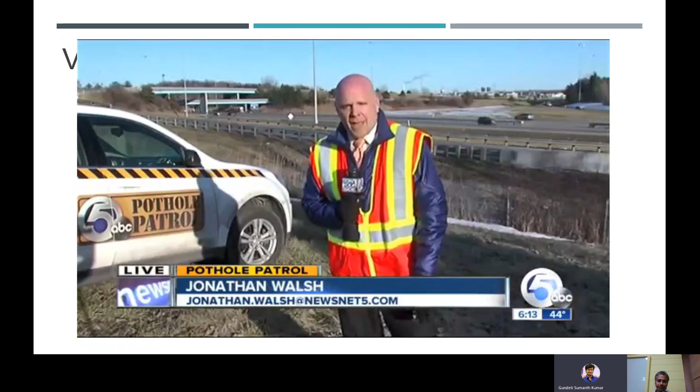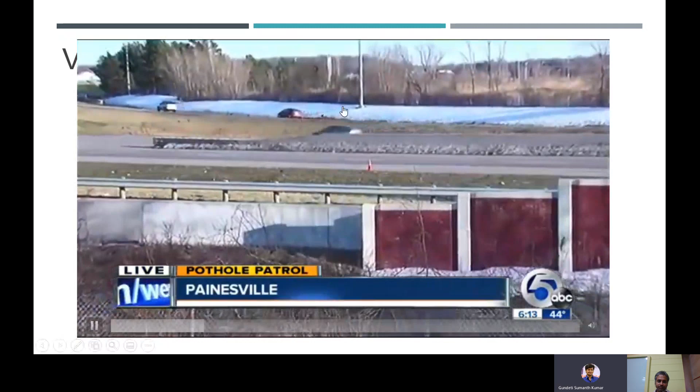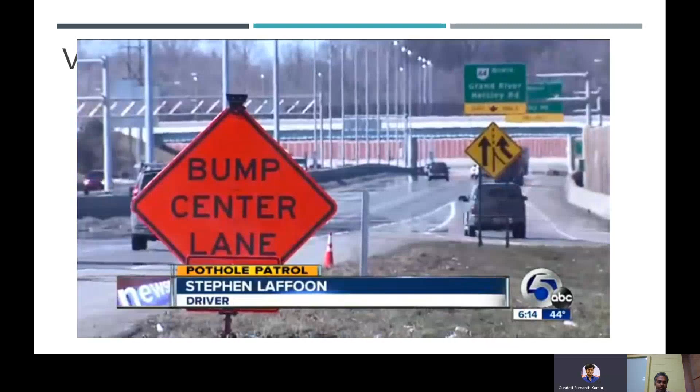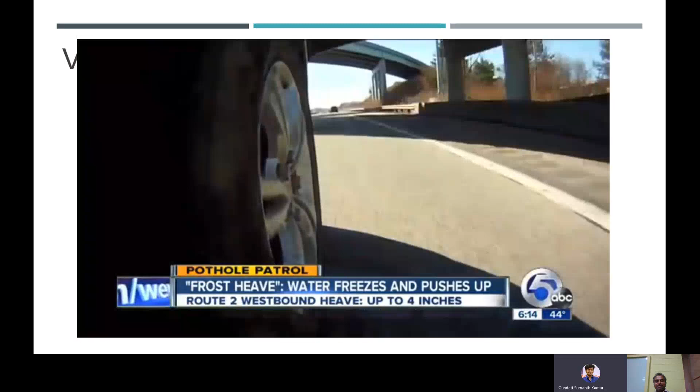These are the photos. These what is the problem? See, this happened because of the frost heave, and they already marked it. That on the road you can see the mark, the red color. They made a mark or symbol also in that on the road. See, this is what. Hmm.

Yeah, this was the pothole. These were the potholes created by the frost heave.

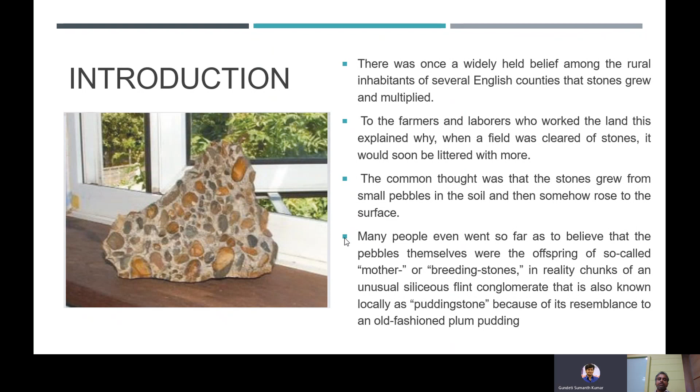There was once a widely held belief among the rural inhabitants of several English counties that stones grew and multiplied. To the farmers and laborers who worked the land, this explained why, when a field was cleared of stones, it would soon be littered again. Actually, what was the thought? The stones grew from small pebbles in the soil, then somehow rose to the surface. Many people even believed that these pebbles were the offspring of so-called mother or breeding stones, calling this phenomenon, or the stones derived from it, pudding stone.

In this video, let me explain what is frost heaving and how frost heaving affects foundations.

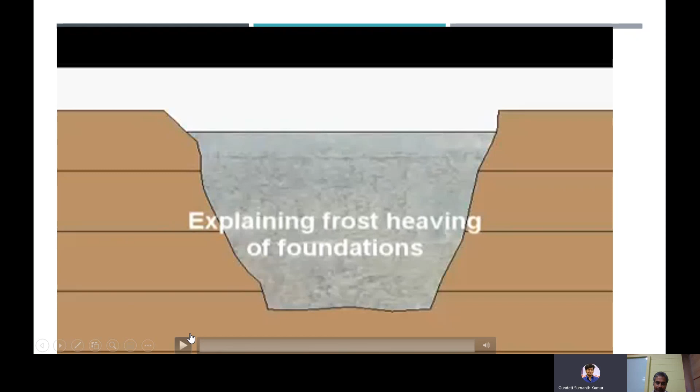This is the reason for those potholes and swelling of the soil.

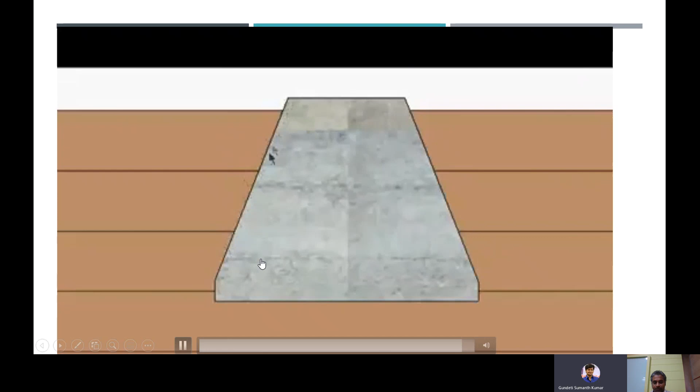So what is this frost heaving? Let us define this phenomenon. It's an upward swelling of soil. It happens whenever groundwater on freezing expands, and it generally occurs when the freezing temperature penetrates the soil and turns the existing moisture into ice, thereby generating an upward movement in the soil. This movement is called heaving, and the size of the ice mass increases because of the continuous supply of moisture.

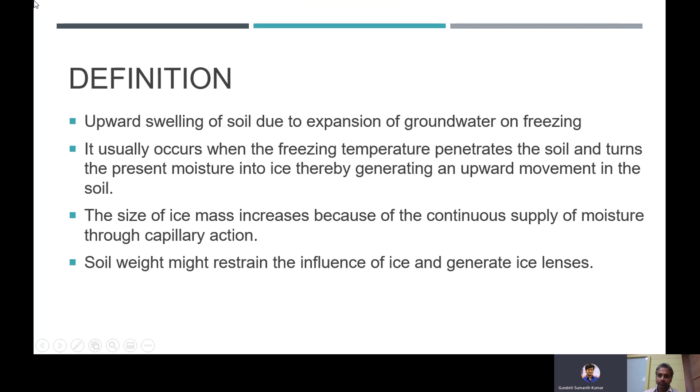Capillary action is a very common process in geotechnical engineering. The soil weight may restrain the influence of ice and generate ice lenses. So we can see a particular ground where this frost heave has already occurred, and the soil where it happens is called thawed soil, which is coalesced ice-rich soil. Ice grows toward the surface and upwards from the depth in the soil where freezing temperatures have penetrated. This leads to swelling of the soil.

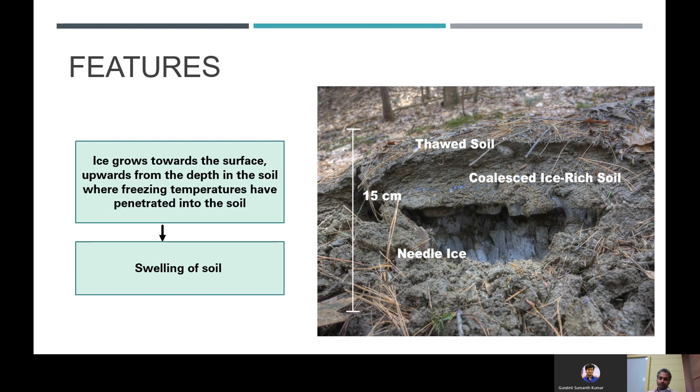Mechanism - let us go through the minute mechanism of this frost heaving. In order to grow this ice, in order to form ice lenses, what do you require? We require a water supply that delivers water to the freezing front. How can we achieve this? This is achieved by capillary action in certain soils.

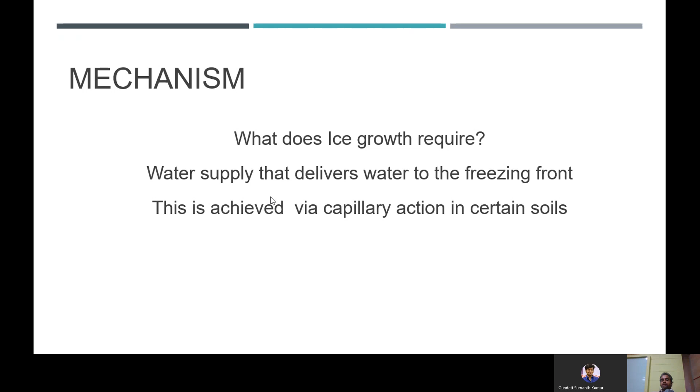We have to highlight two phrases: one is capillary action, the other is certain soils. Let us explain this mechanism further.

As freezing temperature penetrates into the soil, it converts the soil's moisture into ice. When moisture at the freezing area, as you can see in the figure, solidifies, water from other parts of the soil also moves forward to the freezing area. This happens due to capillary action. So what will happen? There will be an increase in the size of the ice mass. So soil weight and other objects above would restrain this ice growth, and consequently ice lenses are formed.

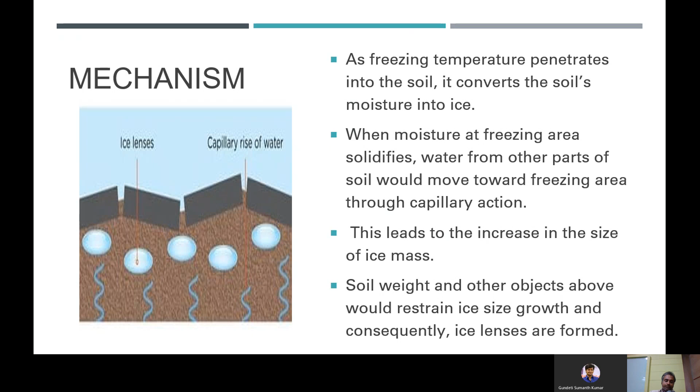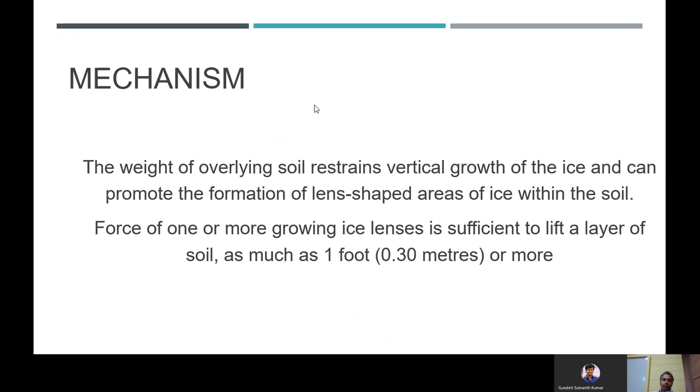The weight of the overlying soil restrains the vertical growth of the ice and can promote the formation of lens-shaped areas of ice within the soil. The force of one or more growing ice lenses is sufficient to lift a layer of soil by a foot or more.

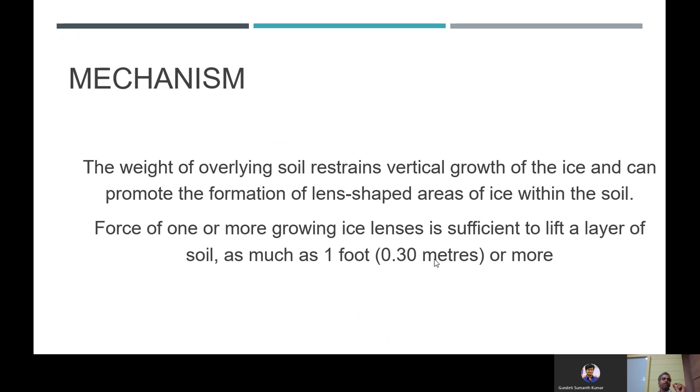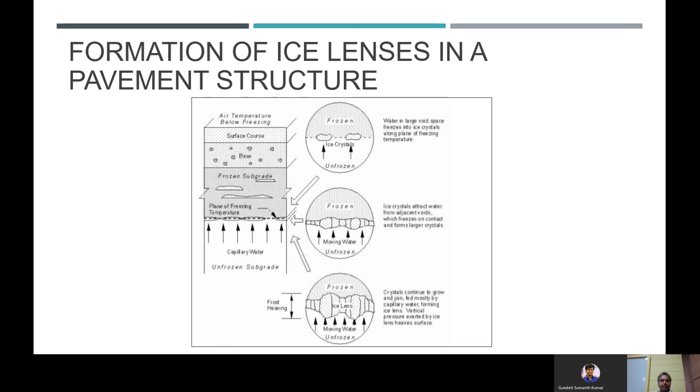Water moves upward due to capillary action into this layer, and ice crystals attract water from adjacent voids, which freezes on contact and forms larger crystals. Water moves from the unfrozen layer to the frozen portion, and the crystals continue to grow and join, fed mostly by capillary water, forming ice lenses. The vertical pressure exerted by these ice lenses causes the surface to heave, which is why it's called frost heave.

What are the problems when this happens? We have already seen in the introductory slide demonstrations of problems occurring in pavements. Generally these problems are very common in pavements, though there are other places also disturbed by this process.

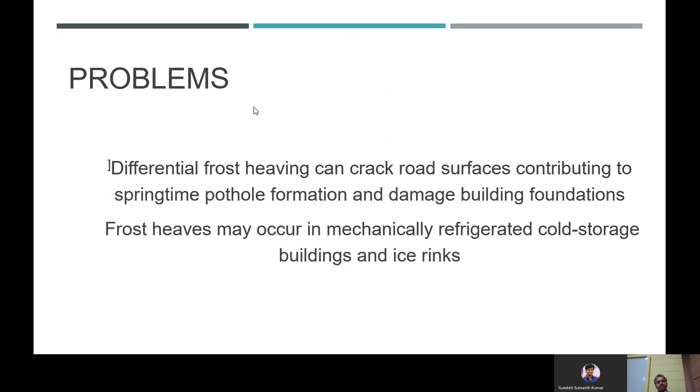This can crack road surfaces. It's very common in springtime pothole formation, and as we saw in the introductory slides, it can damage building foundations. This may also occur in mechanically refrigerated cold storage buildings and ice rinks, a phenomenon quite common in winter countries.

New people might notice this particular needle ice even in Shimla or in India. It appears in winters in the ground, and this is called needle ice. This is the reason - we can see the sign of frost heave even visible at ground level in the form of needle ice.

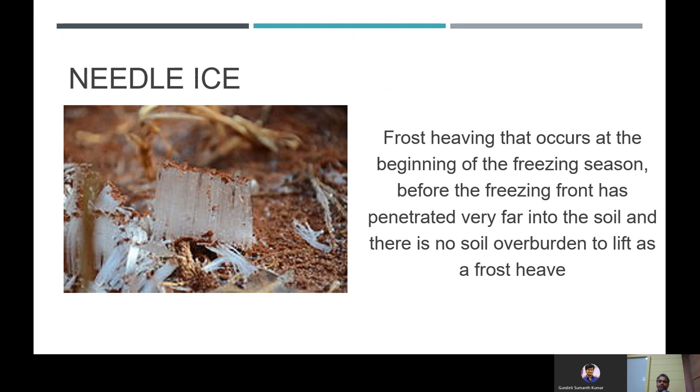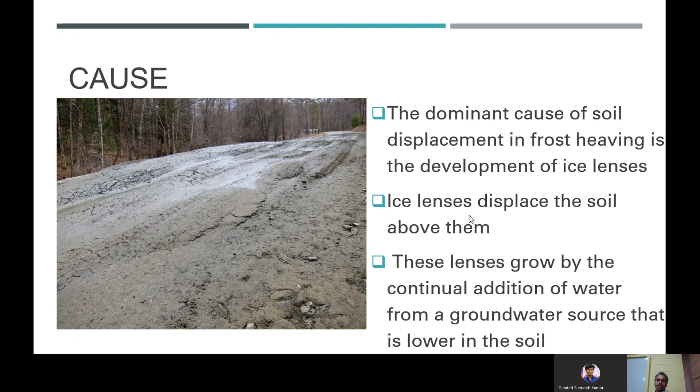The dominant cause of soil displacement in frost heaving is the development of ice lenses, as already explained. Ice lenses displace the soil above them, and these lenses grow by the continual addition of water from a groundwater source, which must be present lower in the soil, causing continual addition of water from below - that is the reason for the formation of ice lenses.

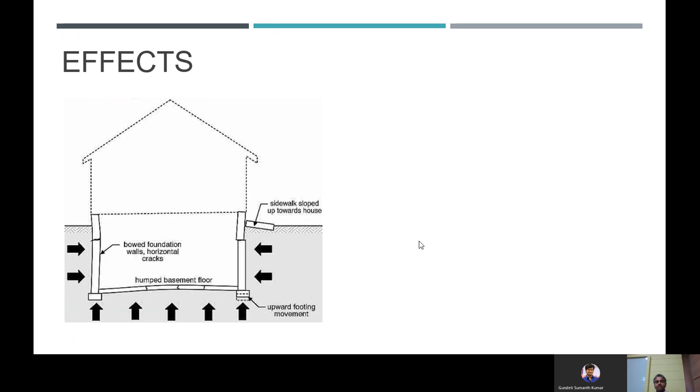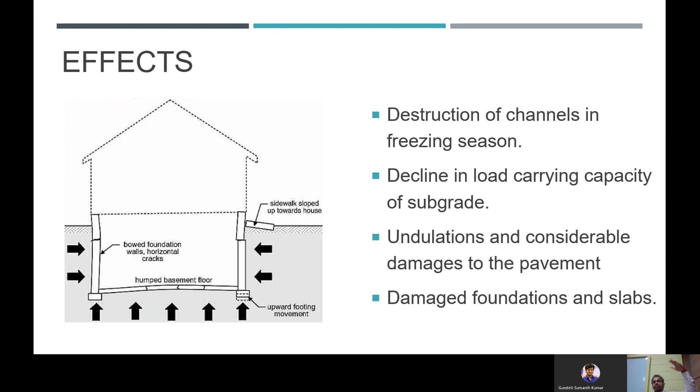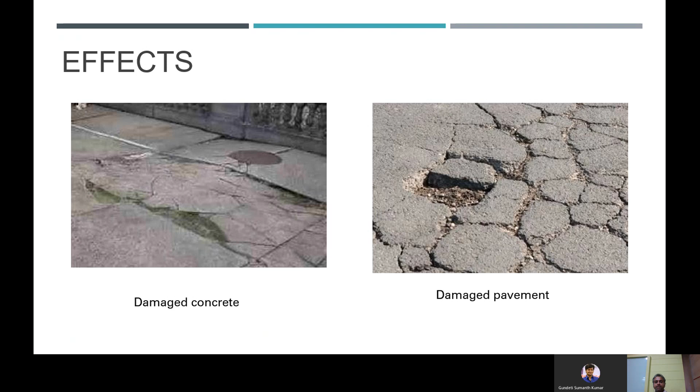We can see a typical figure of a building affected by frost heaving in this slide. In freezing season, channels may be destroyed and the load carrying capacity of subgrade will decline, causing considerable damage to pavement. Foundations and slabs may be damaged, as we saw in the introductory slide, with gaps created by this freezing phenomena. These effects are quite common in colder countries, causing damage to both concrete and pavement.

Now let me go to some soil mechanics part of this frost heaving. This phenomenon is not common in all types of soil - it only occurs in frost susceptible soil. Now, what is frost susceptible soil?

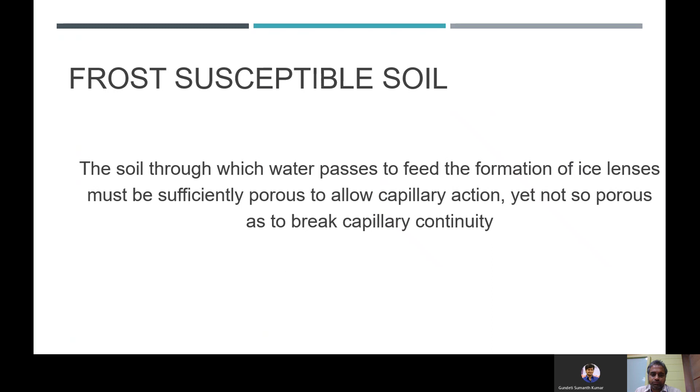It is soil through which water passes. In that soil, it must be possible for water to pass to feed the formation of ice lenses, and it must be sufficiently porous. But it must not be so porous that capillary continuity is broken. So there are many conditions that must be satisfied for frost heaving to occur. Let us go into detail on that aspect now.

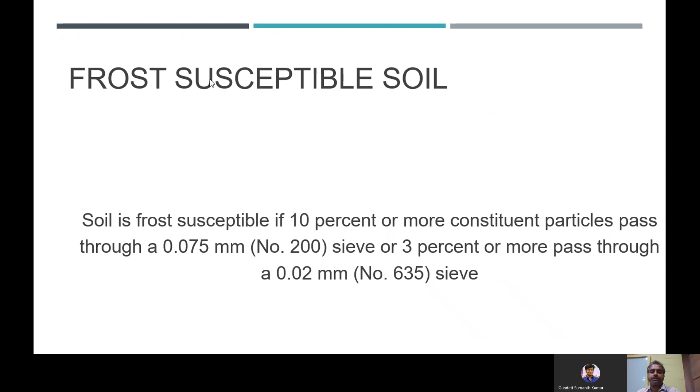There is one particular condition given in various standards. Whenever you want to call a soil frost susceptible, this condition has to be satisfied: 10% or more constituent particles pass through a 0.075 mm sieve, or 3% or more pass through a 0.02 mm sieve. Then only the soil is frost susceptible.

Let me go in detail into the Casagrande criterion. Casagrande worked widely and extensively in this particular process.

Under natural freezing conditions and with sufficient water supply, one should expect considerable ice segregation in non-uniform soils containing more than 3% of grains smaller than 0.02 mm, and in very uniform soils containing more than 10% smaller than 0.02 mm. No ice segregation was observed in soils containing less than 1% of grains smaller than 0.02 mm, even if the groundwater level is as high as the frost line.

So even if the groundwater level is so high, it will not happen in all types of soil. This was observed by Casagrande, and we can call this particular criterion for frost heaving the Casagrande criterion.

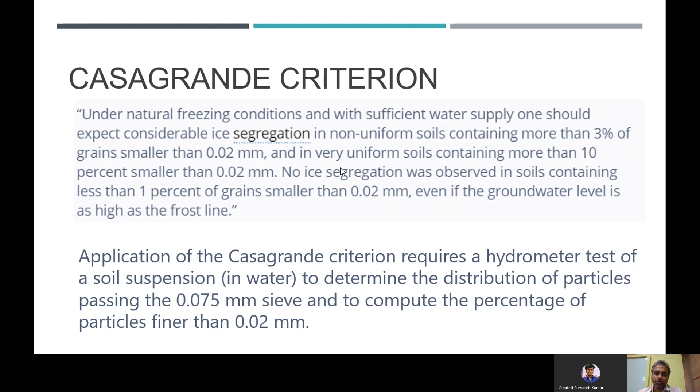An application of the Casagrande criterion requires a way to ensure and predict, during soil investigation, whether a particular soil will be susceptible or not. The method generally used by soil mechanics engineers is called the hydrometer test. When you do it, we can find out the particle size distribution and check whether it falls within this limit or not.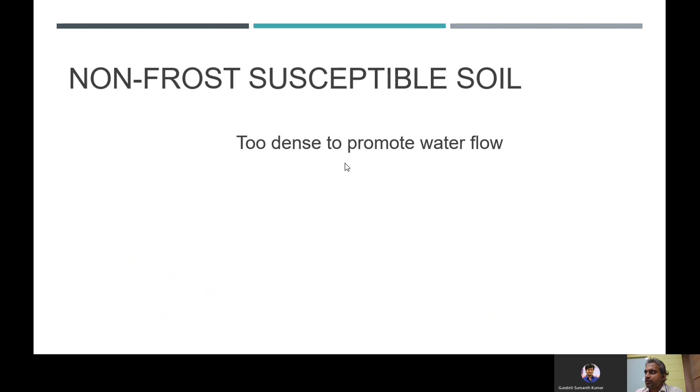Now, there are non-frost susceptible soils. If the soil is too dense, there will not be any water flow. If the soil is very permeable, like sand and gravel, then there is no chance of frost heaving. It must not be so open that capillary flow is promoted by such soil. So the soil must not be too dense, must not be too permeable, and must not be too open or too porous.

So dense clays with small pore size - even fine soils like loamy soil and silty soil, as I already showed you, have many chances of frost heaving occurring. But in dense clays with very small pore size, we can tell that frost heaving will not occur.

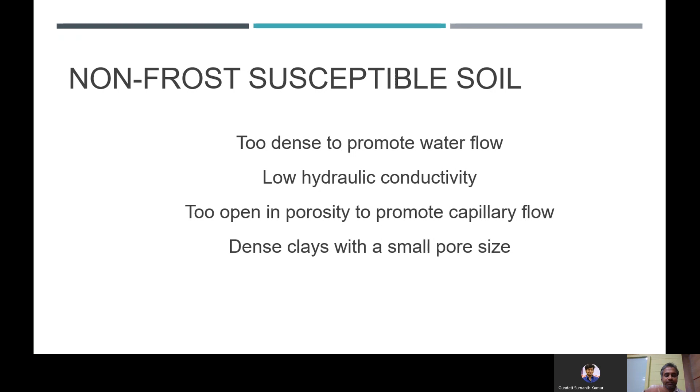Clean sands and gravels - in such types of soils, frost heaving does not occur.

In refrigerated buildings, when the foundation is placed on frost susceptible soils and the water table is within reach of the freezing front, the floors of the structures may heave. I already explained the reason for this particular mechanism.

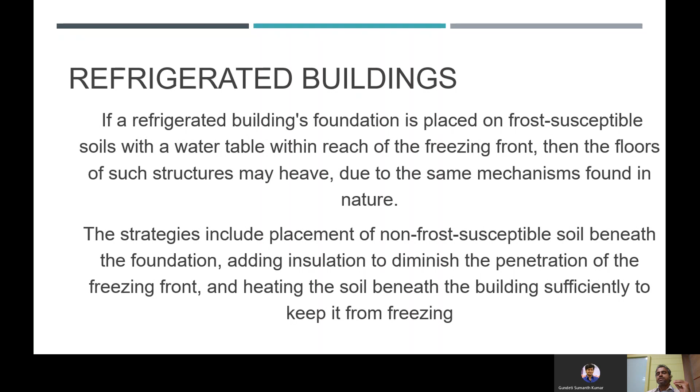So what must be the strategy as a geotechnical engineer? We have to include the placement of non-frost susceptible soil beneath the foundation. You can also add insulation to diminish the penetration of the freezing front, and you can heat the soil beneath the building sufficiently so that freezing will not occur.

What are the controlling factors for frost heaving? The first condition is that the soil must be frost susceptible, as already explained. There must also be sufficient quantities of water availability, and cooling conditions must be present - this has to be thermodynamically satisfied.

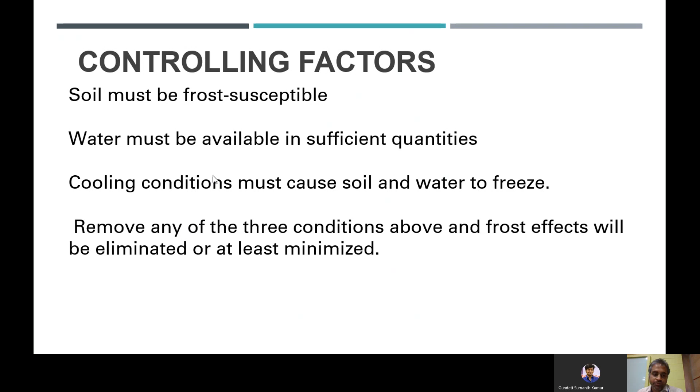If one condition is not satisfied - for example, water is available in sufficient quantity and cooling conditions occur, but the soil is not susceptible - this condition will never lead to frost heaving. So the chance of frost heaving is very minimal in such cases.

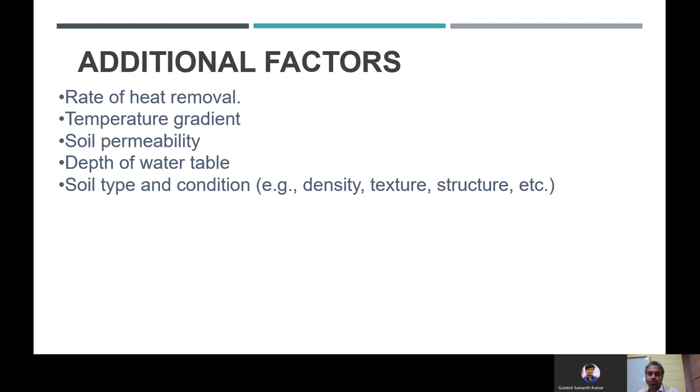There are some additional factors we have to consider: rate of heat removal, temperature gradient, soil permeability, depth of water table, and soil type condition. For a comprehensive presentation on frost heaving, all these aspects also need to be included and considered. Otherwise, this topic will not be complete.

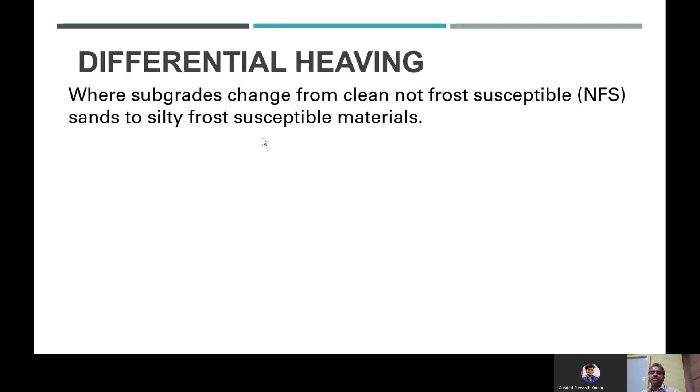Where the subgrade changes from clean, not frost susceptible sands to silty frost susceptible material, there is a chance of differential heaving. Abrupt transitions happen in some cases where cut meets fill with groundwater close to the surface, and in such cases differential heaving can also occur.

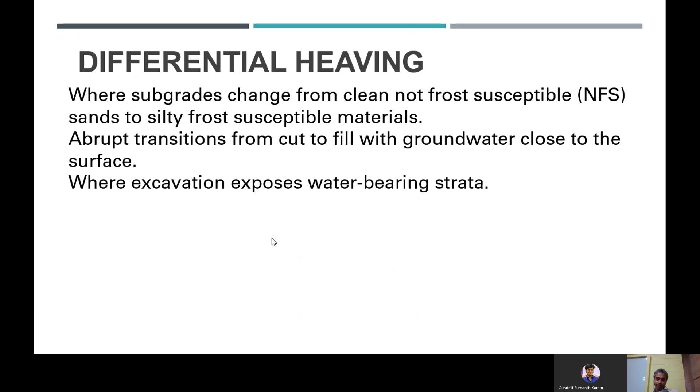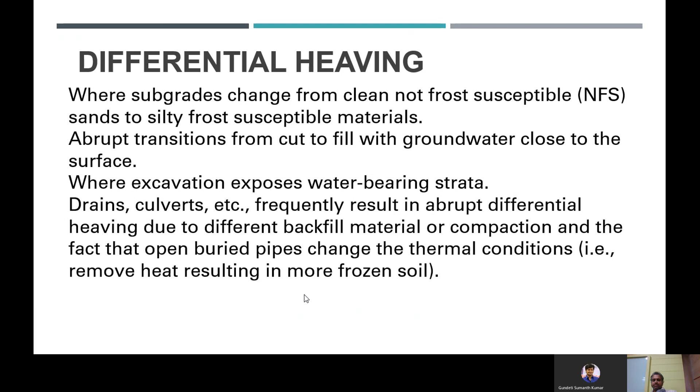Excavation exposes water-bearing strata, drains, culverts, etc. This frequently results in abrupt differential heaving because there is different backfill material and compaction is different, and buried pipes also change the thermal condition, with heat resulting in more frozen soil being removed.

So when I explained this particular topic, I showed you problems of frost heaving generally in foundations and pavements. Now this phenomenon is also common in tunneling, and this happens when you freeze the ground.

There is one particular technology, I don't know whether you are aware or not, called ground freezing. This ground freezing is a ground improvement technique that we follow in tunneling. For excavation, we improve the ground and then we excavate.

In such cases, what will happen? This frost heaving is also common in frozen ground, where we have adopted the technology of ground freezing to improve the ground. Frost heaving is also common there.

The hazard of frost heave mainly consists of the oversizing of the frozen soil volume. Where the soil is oversized and frozen, it is common. What happens is it takes so much time freezing, and if no control measure is properly done for frost heave, or this aspect is not considered while we design ground freezing, there are chances of frost heaving to occur.

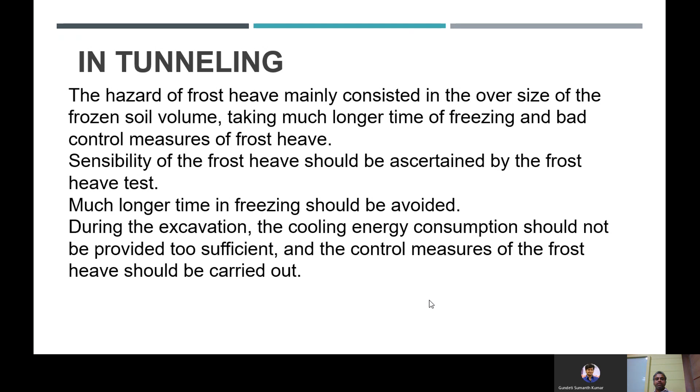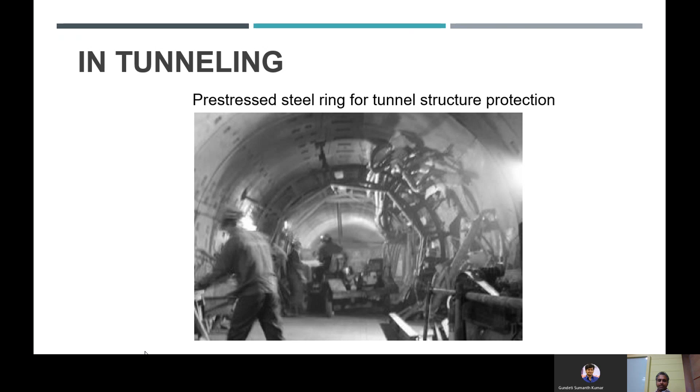We have given one pre-stressed steel ring also for tunnel structure protection, so if anything happens, the steel ring will take care of the frost heaving. This provision is for frost heave. Now, what can we do to prevent this frost heaving?

Frost heave prevention systems such as hydronic heating systems shall be provided, and extend foundations such as piers below the frost line, as we generally do. Provide backfill material, as I already explained, such as gravel around foundations first to encourage water drainage.

We have to use a sleeve to avoid ice from gripping the concrete, and construct footings that withstand upward movement. For road construction, we have to replace frost susceptible soil with coarse granular soil. Use a capillary breaker to prevent movement of water towards the freezing front.

So this upward movement has to be stopped, and we generally give this capillary breaker. Very importantly, we can use an easy method to stabilize the soil by lime, cement, or whatever. These are the various methods of preventing frosting.

Frosting is not a very common phenomenon in geotechnical engineering which we generally encounter. So why did I do a presentation on this? It is for me also to do some research in this area, and I just wanted to share this information with you, and I'd like to learn more so that we can get more knowledge in this field.